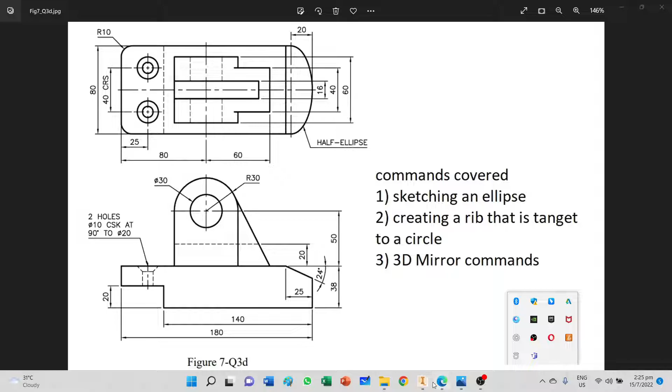Without further ado, let's start. Click new, metric, standard, create. I'll be creating on my XZ plane.

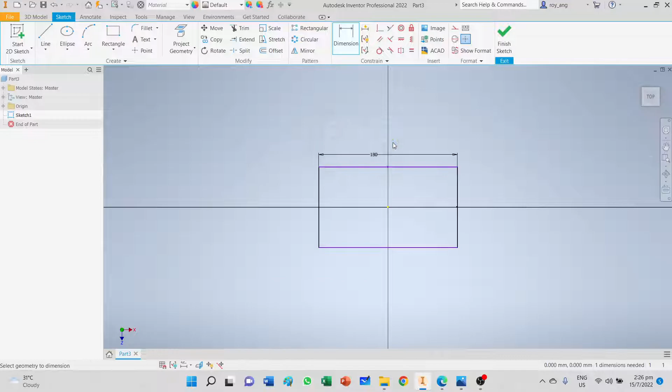For the base, I'm going to centralize it. The reason why I centralize it is so that the work planes run through the center of the part in a symmetrical way, and I can make use of the default work planes as my mirror planes. Because if I don't, I need to create extra work planes, which would lower my efficiency. 180 in length, and 80 millimeters in width.

Click OK, and then I can extrude up by a distance of 30 millimeters. Just to check real quick, 38 millimeters.

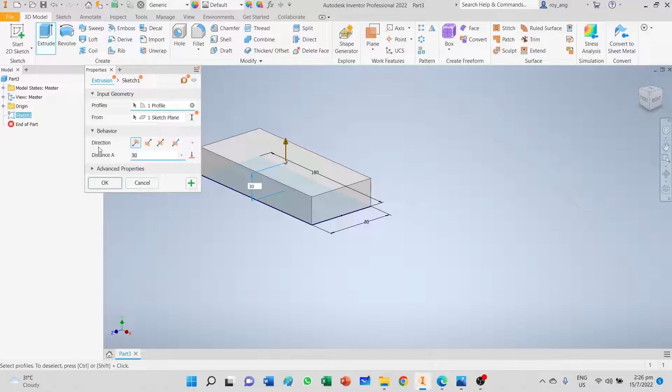Then there is a cutout at the bottom here. You always ensure that your sketches are fully constrained. The height of the cutout is 20 millimeters, and the width of the cutout is 40 millimeters.

How did I get 40? If you look at the drawing, the full length is 180, and the bottom segment is 140, so 180 minus 140 gives you 40 millimeters.

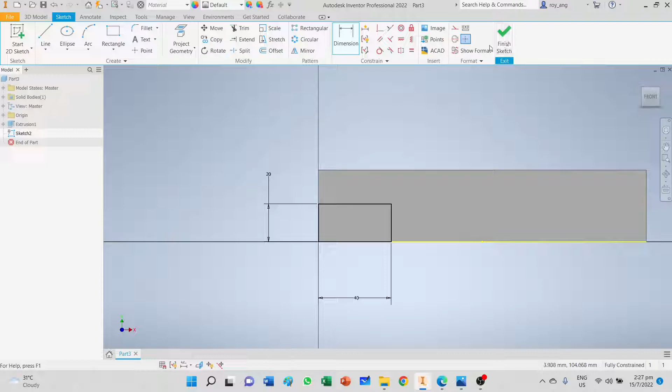I'll finish my sketch and extrude cut through all, and OK.

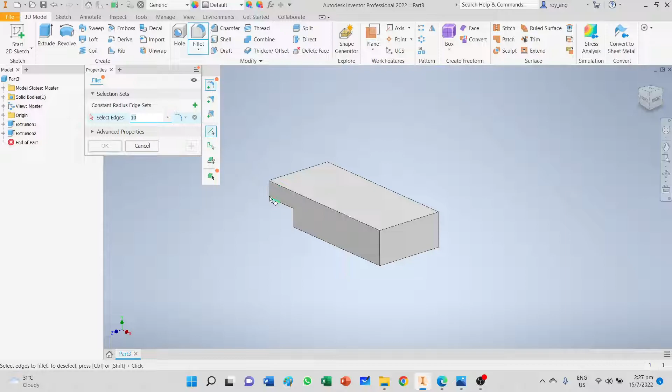Then I'll go on with my fillet. My fillet radius for the back corners is R10 for two corners. The drawing should reflect 2 times R10 - that's a mistake over there, please take note. For R10, I select one corner, press shift, move over to this corner, then click OK.

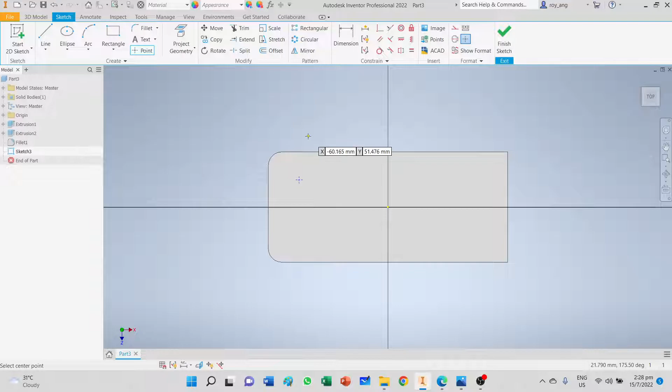Then I will draw my countersunk holes. I'll rotate it so that it's clear. Put in my point, and then put in the distances of the point to the edge as per the dimension drawing. Don't deviate from it, because if you do, you may lose marks from there.

Okay, so this is 25, and this one is 40, which is 20.

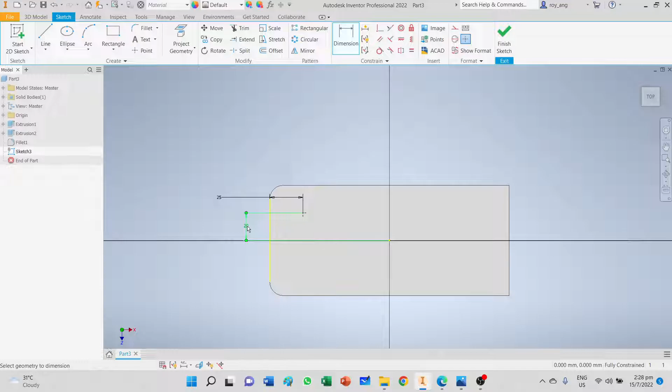Now one of the common mistakes is students always presume that the hole is always sharing the same center as the fillet. No, not necessarily. So you have to be careful with that and don't fall for that trap.

Now the next thing is a hole, and this hole is a lot smaller. This hole is a countersunk hole, diameter 10, and then countersunk at 90 degrees to diameter 20. So these are the numbers you have to put in: diameter 10, and then because it's countersunk, you put this one here.

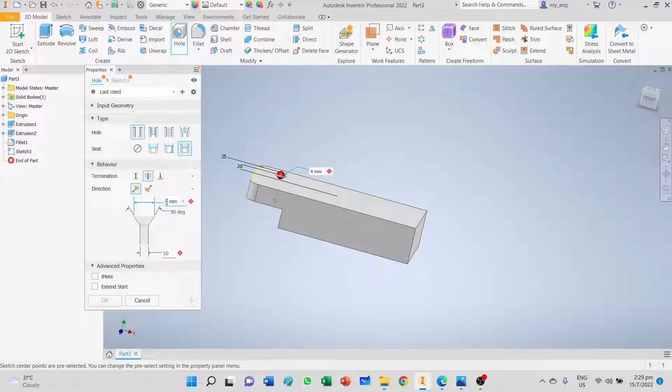The reason why you get an exclamation mark means there is an error in your design. There's an error because 4 is just too small. It's not supposed to be 4, it's 20. Once that's done, you have your countersunk hole.

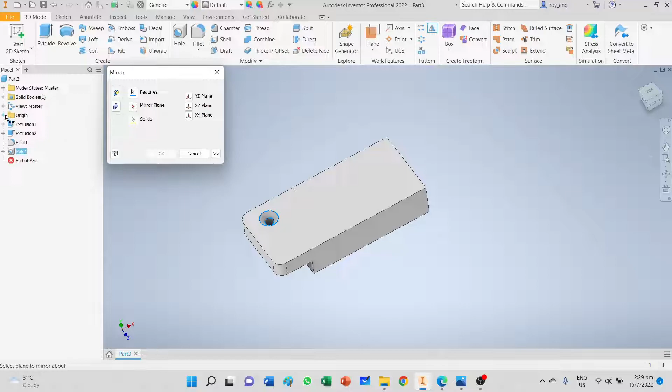The way this particular module wants you to do it is to create a 3D mirrored feature. You create the 3D mirrored feature, and the feature that you select is the hole. And for the mirror plane, you need to click on the plus sign next to the origin folder and find the mirror plane that is symmetrical to your part.

It doesn't look symmetrical to your part because you're looking at it from an isometric point of view, but if you were to see it like this, it is symmetrical. Why is it symmetrical? Because when I created my block, one of the first few steps I did was align it to the midpoints so that the block is centered. That was one of the things.

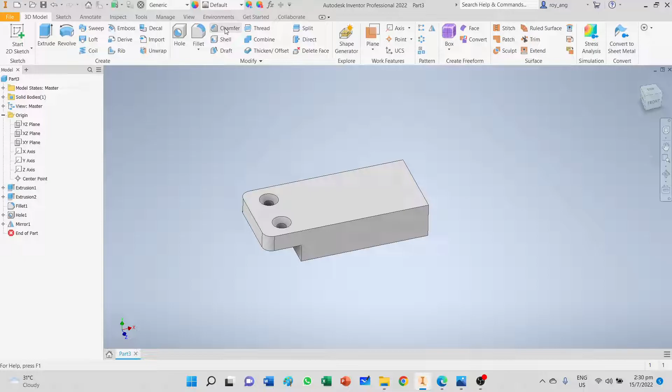The next thing I'm going to create is this chamfer at 24 degrees, 25 mm distance. So the chamfer is at an angle. The distance is 25 and the angle is 24 degrees.

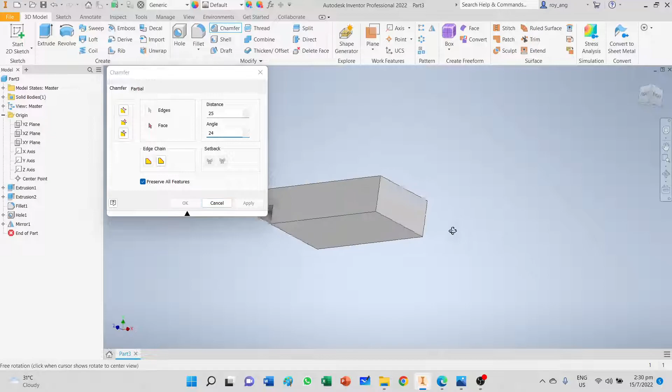What I need to do is select the face, as they will ask you to. This is the face and this is the edge. Now if you select it wrongly, you need to select the other edge, the other face, and select the edge. So you click apply and that's your chamfer.

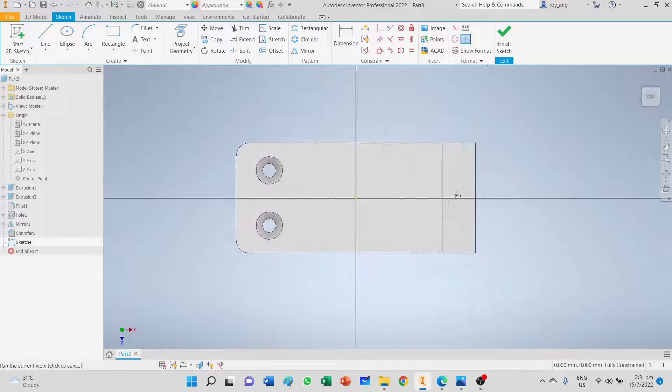After the chamfer, I'm going to draw the ellipse. Where do you draw the ellipse? The ellipse is from the circle command, you need to go all the way down here and move your mouse to the center. I select the top surface, select this bottom surface.

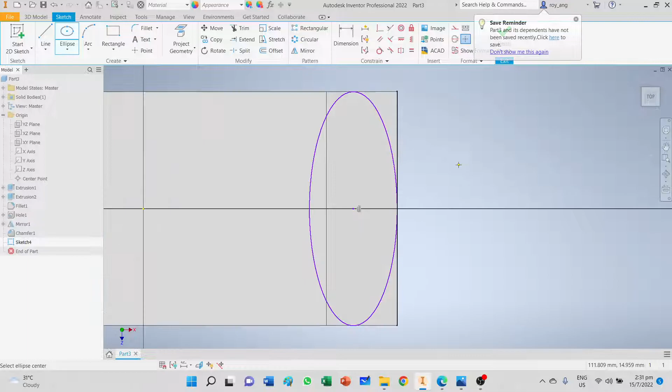What will happen is that as you dimension the ellipse, it may run around, it may just move around, and then you need to use the constraint commands to constrain your ellipse into position. Like for this case, the ellipse is coming out, so you need to ensure that this is tangent to this edge. So that's how it goes.

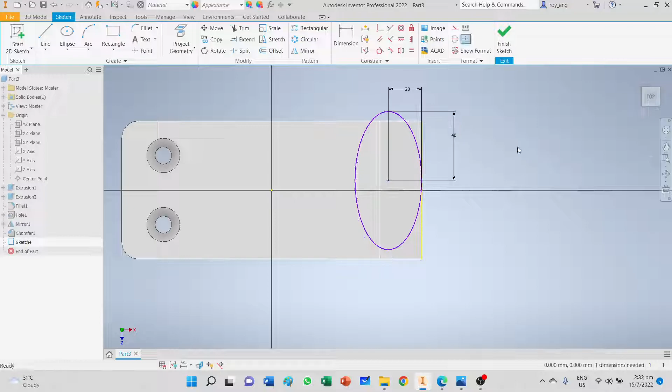Now the ellipse doesn't seem to be fully constrained, and that's because it can still move, it can move this way. So what you need to do is ensure that it is horizontally constrained to the center over here. So there you see it's a black colored ellipse.

Now we're going to cut the ellipse out, this portion out here. By drawing an ellipse here, you will be wondering how am I going to cut it out? So what you can do is use the rectangle command, and one of the ways I do it is I draw a rectangle out, and then I'll align the rectangle to the edge, and give a length so that it's fully constrained, say maybe 10 millimeters. That's good enough for me, and then I can trim it.

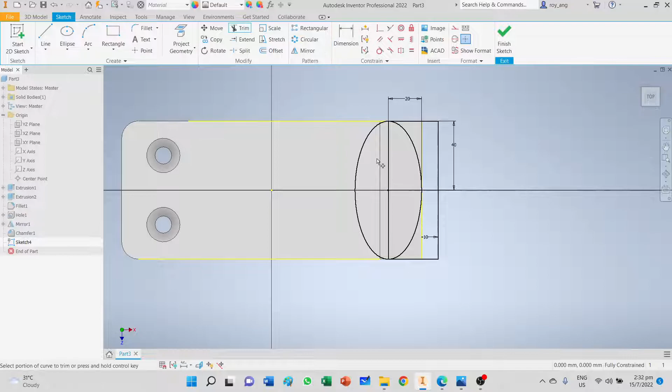I don't need this and I don't need this edge. So with that, I'm able to just extrude and cut through the whole entire thing. Let's see. Yes, okay, and I click OK. And that's how I have my ellipse.

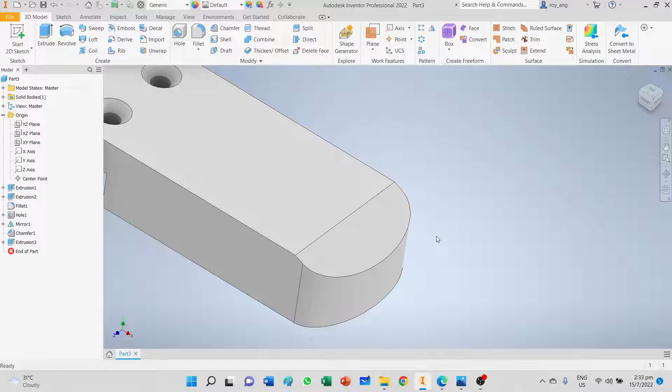Got it? Now I finished the features of the bottom component. Next, I will go on to my XY plane, and then I will draw the lug or the tower.

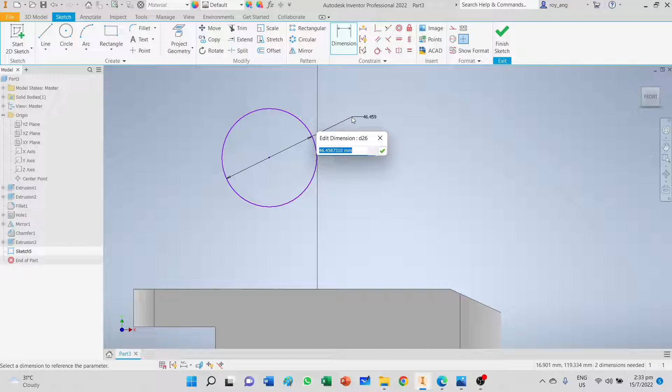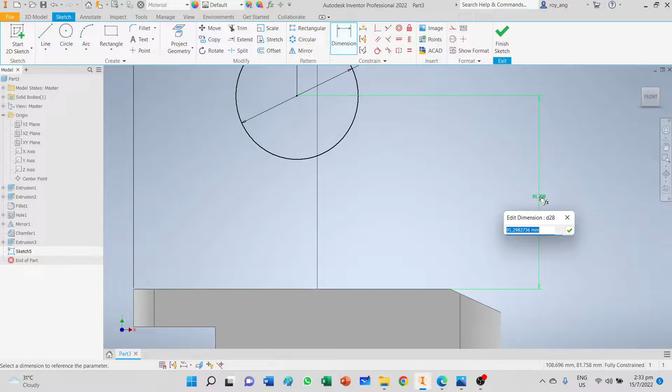The radius is 30, so the diameter is 60, and the distance to the back—wait, let me see—yes, the distance to the back is 80 millimeters, so I need to follow it accordingly. And the height of this to the bottom is 50 millimeters. So my circle is fully constrained.

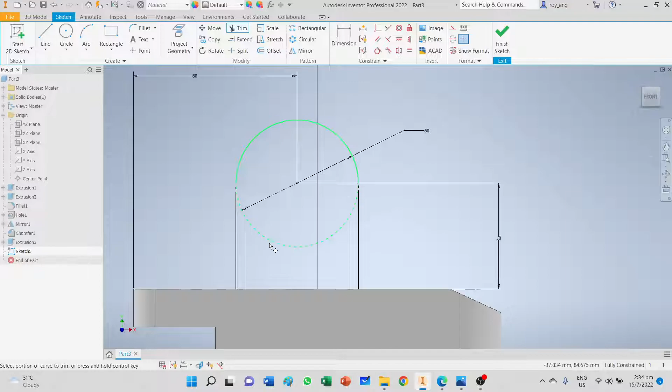Bring it back down, and then I trim it. Now it is not always that the lines will turn black automatically, because sometimes when you click on it, they may not include the constraint to your sketch. And if they didn't include it, you will need to add it in later. So that's why sometimes my lines turn blue, and I need to tidy it up.

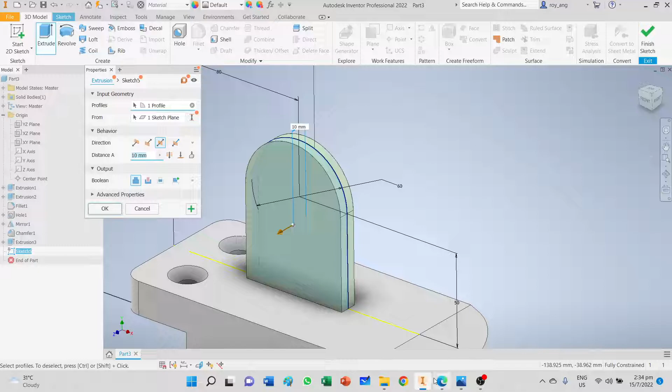Now with this, I'm going to extrude both sides, by 60 millimeters. Let's just confirm first with the drawing. The width of the tower or the lug is 60 millimeters, and the width of the web, this triangle web, is 40 millimeters. So it's 60, right, so I'm going to put 60 millimeters.

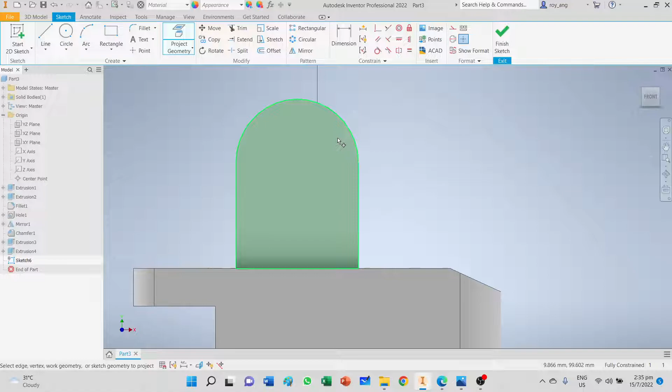60 millimeters. Next thing I'm going to do is draw the web. For the web, I will need to make use of this curved surface, so I can just click on this or this to create my projected geometry. And then I'll move my line, I'll just draw a line first.

It's a blue line, and this is the point where I will shift and turn it a little so that I can pick out my point. I can pick out my point, and my point is here, and it is measured to the center of the circle. It's measured to the center of the circle.

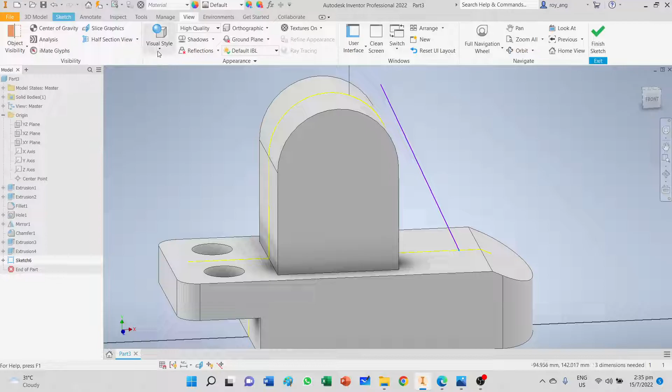I can't see it right now, so what I need to do is go to view, wireframe. Yes, there is the center. So under my sketch, select this dot and this dot, and the dimension for this is 60 millimeters. So you need to get that right.

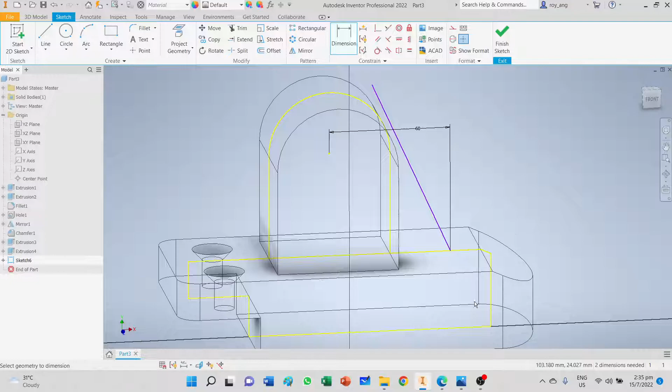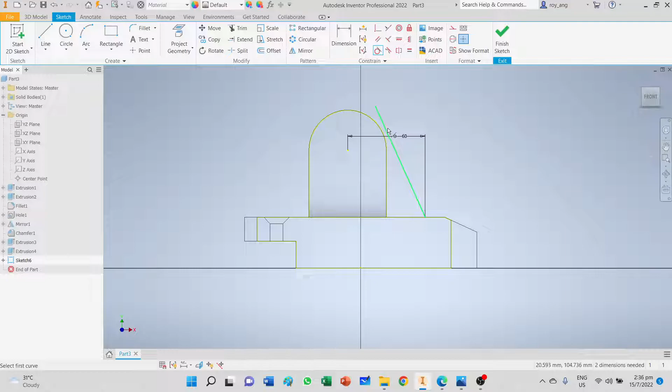It's 60 millimeters, which is here. From the front bottom edge of the web to the center of the circle is 60 millimeters, so we need to draw that out. Then we have that line tangent to this edge, and that's how you end up getting a black line. Then you click on the trim, click on the extra part, and you are done.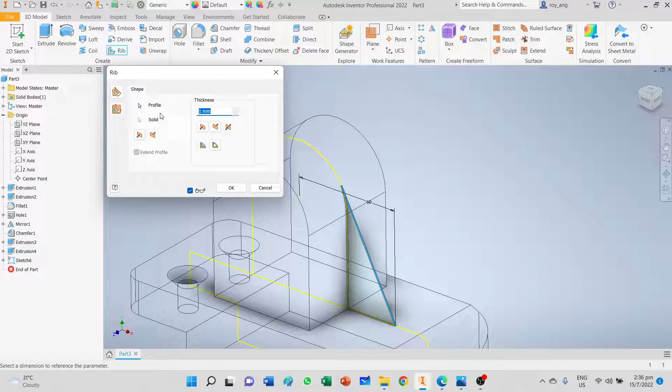And you're ready to create your rib. Create your rib, this is the one. Select your rib, and then the width of the rib is 40 millimeters. Alright, let's go back to the view and have the view with shaded edges, and this is how it looks.

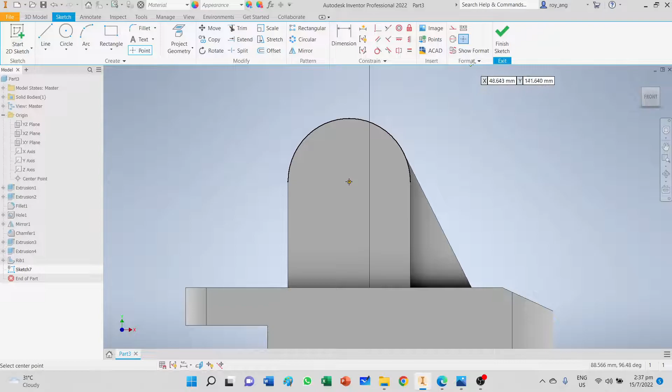The next thing I'm drawing would be the circle that runs through the center. So it's a point, move my mouse to the edge of the circumference, drop in that point, and I'm good to create using the hole command. There is no seat, and I'm going to draw a hole diameter 30. Enter.

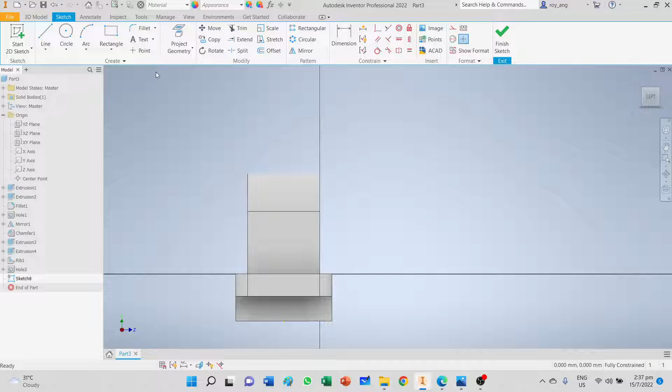Alright, and the very last one is the cutout from the back. How I'm going to do it is I'm going to draw a rectangle, and I may just go to my view and view it in wireframe so that I can see my centers. Then I go back to my sketch command and put my vertical constraints. Vertical constraint, and the width of the cutout slot is 16 millimeters.

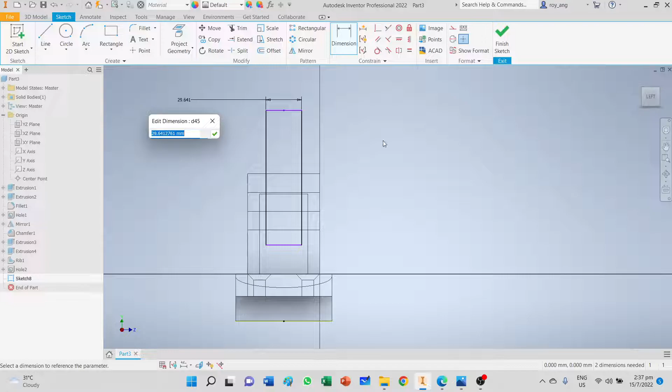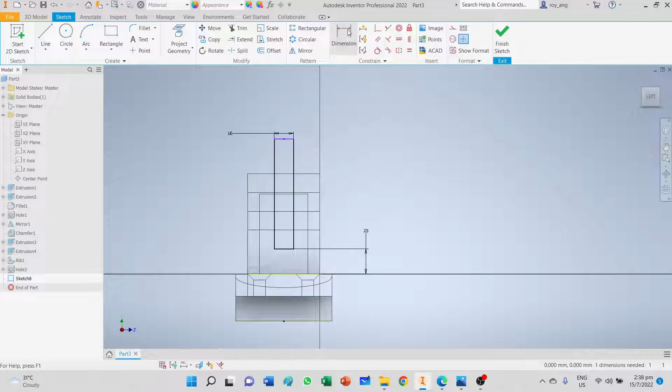And the height of the cutout slot to the bottom is 20 millimeters. This sketch is not fully constrained because this segment here is not defined, and I can move it up and down, and as long as it is above the component, you're good. So just give it a length, say 88. 88 is good, and you're ready to extrude.

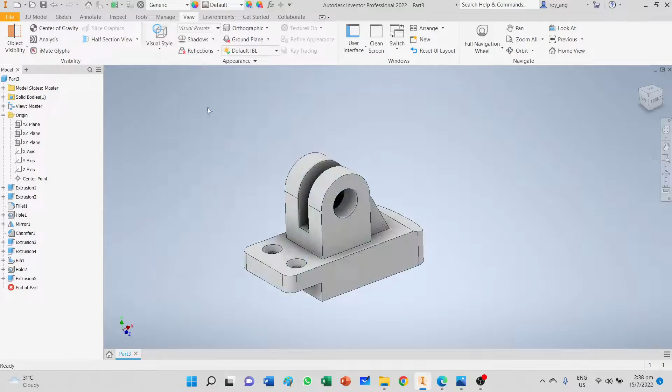You can click finish sketch, extrude cut, and you'll be cutting it through all. Then you click OK. Go to view, shaded with edges, and this is what it looks like, right?

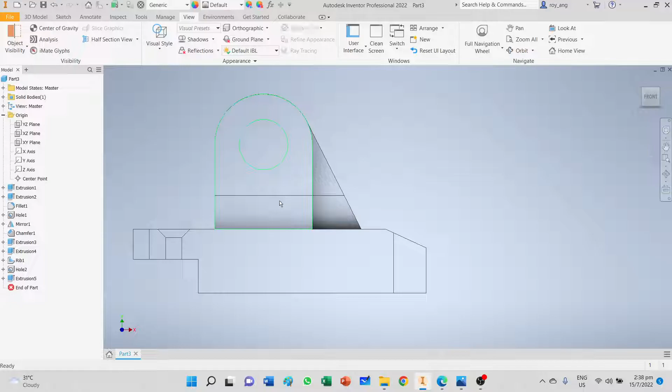Your component. So when you look at it from the side, from the front view, and if you were to change your view style to shaded with hidden edges, hey, why is it not appearing? Or you can see from the wireframe, you can see the hidden line at the bottom. Shaded with hidden edges, I think it's too faint. Yeah, it's too faint, I'm not able to see the hidden edge that runs right through at the bottom.

Okay, and this, my friends, is question 3D. See you again soon.